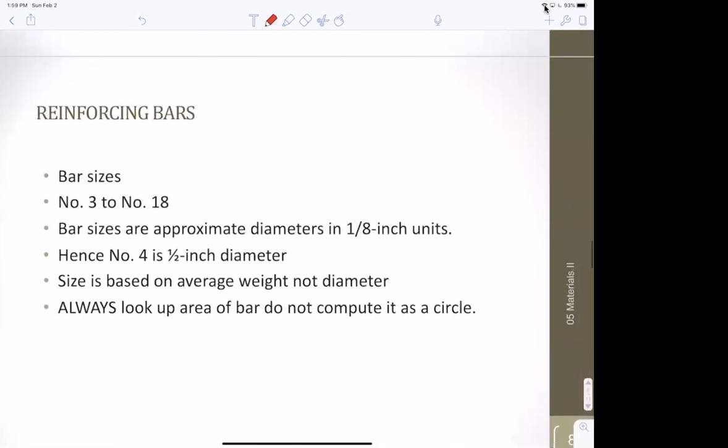Okay, reinforcing bars. We need to talk about this. The steel that goes into concrete comes in bars, and they have different sizes, number 3 through 18. Okay, in this class, we'll use these numbers, but when you buy them, number 3 will say something like 10 on it. I have a table that shows the numbers on the next slide. We'll talk about that. But these bar sizes, we'll use these numbers 3 through 18.

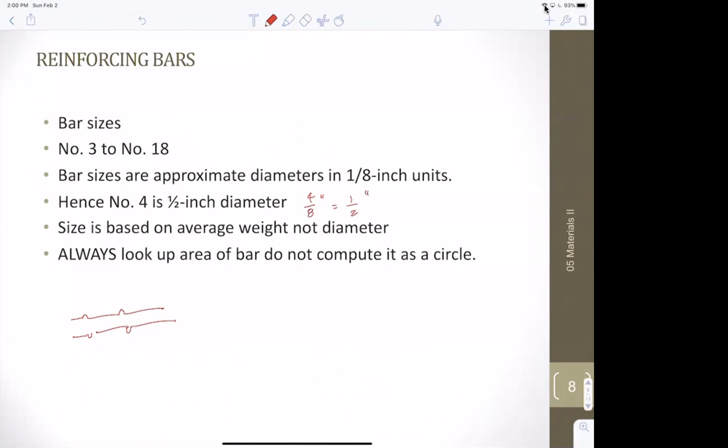They're approximately the diameter in eighths of inches. Okay, so a number 4 is roughly 4/8 inch or ½ inch in diameter. And it's not the actual diameter because these bars, they have ribs on them like this. And so it's the average diameter, not the actual outside diameter. It's based on the weight per foot, and then they calculate what the equivalent diameter will be.

Always look up the area of the bar. Don't compute it as a circle for a couple of reasons. A, it's just more convenient, but B, it's approximately the diameter size. When you get above a number 9, the diameter does not equal the number divided by 8. I'll talk about that in a little bit.

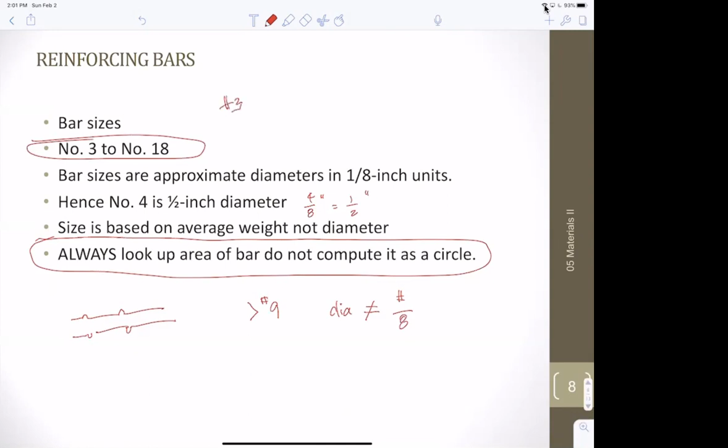Okay, so first thing I want to talk about is the designation. So number 3 bar is roughly 3/8 inch. But on the bar, it will actually say 10 because 10 millimeters is roughly 3/8 inch. Now, why do they do this? Okay, so a while back when the US was considering converting to metric, they passed a law that all rebar would have to have the metric size.

And what we were going to do is go to what's called soft metric. And what that was, it was still a number 3 bar, 3/8 inch diameter, but you would find the closest metric measurement and call it that. And then eventually we would go to the metric bars, and actually the metric bars make more sense. We won't talk about them here. We don't use those, but the metric bars are sized by areas. They're very intelligent, really well done.

And so when you converted to soft metric, all they had to do was take the number 3 off of the bar and put 10 on the bar, because then it would indicate it was 10 millimeters roughly, but it was really 3/8 inch. But you know, these are molds to make these bars, so it's expensive to make this change. You have to throw away all the old molds, make new molds that said 10 on it.

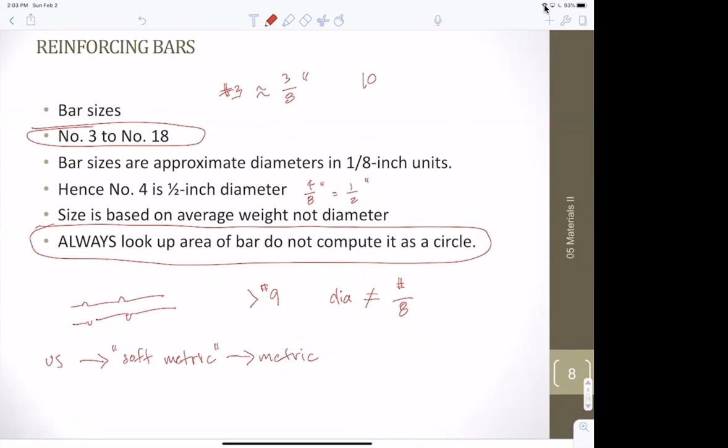Well, we get a few years into this conversion to metric, and then we give up and say, oh, we're going back to English units. Well, the rebar companies are saying, we're not going to make another set of molds. We just changed all our molds over. So we're keeping the metric numbers on them. You're just going to have to remember that 10 actually means a number 3. So here we go.

So first of all, this is from your book. You can see I've got it tagged because I use this table a lot. So these are the numbers you would use in your drawing, number 3, number 4, but these are the actual markings on the bar, 10, 13, 16, and those aren't actually metric bars. There are metric bars. Maybe another day we'll talk about it, or maybe in class I'll talk about the metric bars. And here are the diameters.

And so you can see that it kind of works. See, 3/8, 4/8, 5/8, 6/8, 7/8, 8/8, but here, 9/8 is 1.125. And 10/8 is what? 10 over 8 should be 1.25. So these are all not the right diameters if you take the number and divide it by 8. So what is that? Okay.

Before we had round bars, we had square bars. And so 1 inch square was this. Let me take the square root of 1.27. So 1.27 square inches. Here we go. 1.27. Oh, that's 1 1/8, etc. These are equivalent square bars.

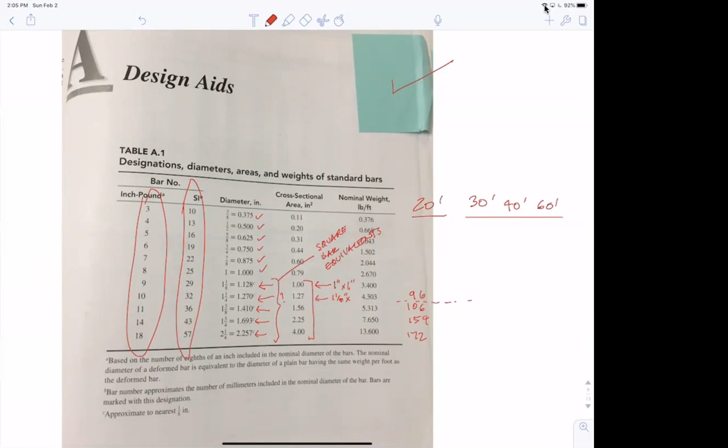And so what happened is that when we changed from square bars to these newfangled circular bars, people back then complained. They say, what? We have to do pi r squared. Square area is just height squared. You guys are making our life so hard. So we kept from number 9 and up, they're actually equivalent square bars, so people would stop complaining.

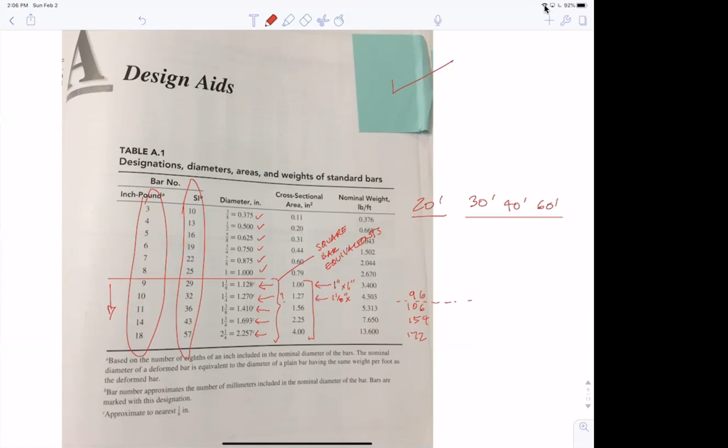I actually have a piece of a square rebar cut from a bridge that sank. Yeah, it's kind of weird. So this is why you can't take the diameter to calculate the area. From number 9 and on, it doesn't work. Okay, so this table is super handy to use in the back of your book.

Okay, so here are what the bar notations look like. And so you can look at the bar. This thing here tells you what mill. See, here's that weird number 11. So number 11, oh, that actually is a 11 bar. So this is old. Now that 11 bar would actually say 36 now. Okay, and here you can see the deformed patterns.

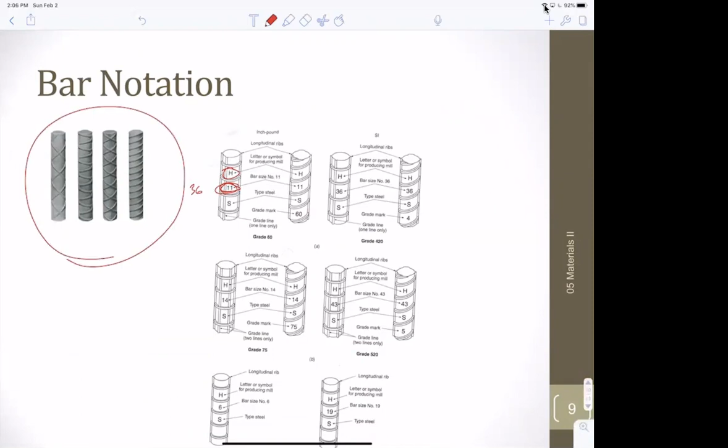Yeah, so this is a little slide on how to read rebar markings. If you're in the field, it used to be easy, like in the lab, I could pick a bar up, say, oh, is it a 3 or a 4? You would look at the number, but now I don't have these numbers memorized, 10, 13, 16, so for me, it's useless. I can't tell what size a bar is by looking at the marker.

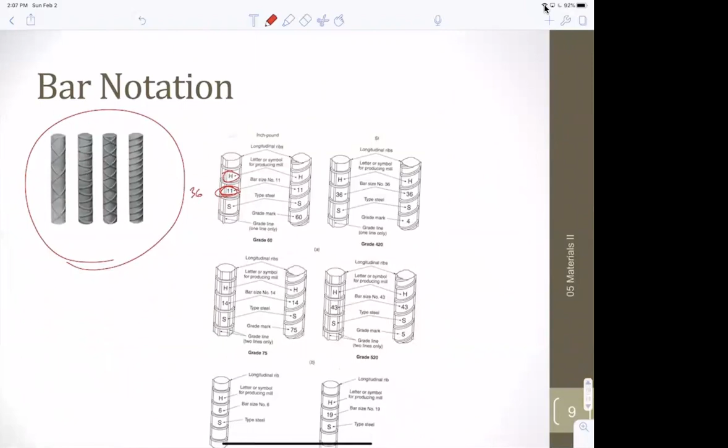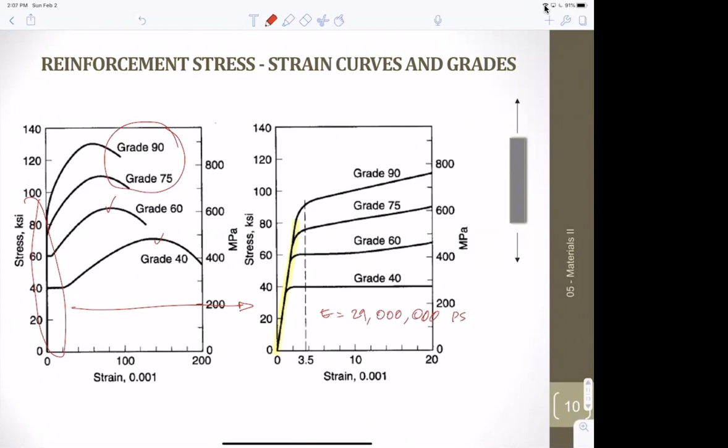And what's interesting, unlike concrete, no matter how strong the steel is, it has the same slope. The E is constant, and it's 29 million psi. So the E of concrete changes with the strength, but the E of steel does not. E is always 29 million for steel.

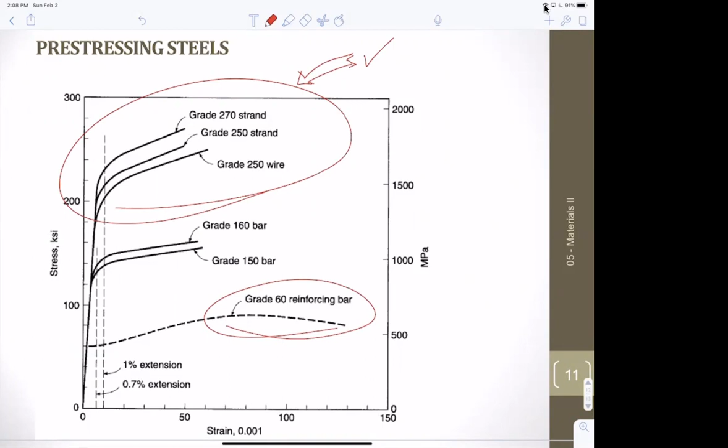Okay, so I want to talk about pre-stressing steel. These are like super high strength, 270 KSI, 250 KSI, compared to what we're using in this class. This is actually kind of a big deal in pre-stressed concrete. You'll talk more about that if you take the pre-stressed concrete class. Until we developed high-strength steel, pre-stressed concrete was not really practical.

Okay, and if you have pre-stressed concrete, it's kind of an interesting thing. So you get some steel, like this, and you stretch it. Obviously, it wouldn't look something like that, but you stretch it to a certain stress, F initial, and then later, it's like the opposite of creep. The deflection is not changing. So in creep, the deflection changes with constant stress.

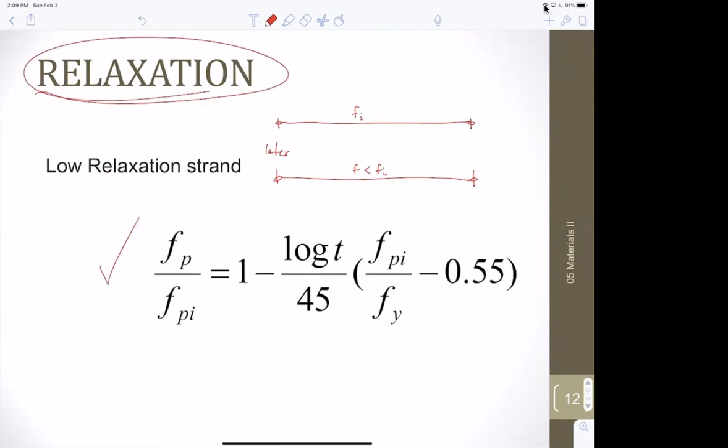Here, the deflection is constant, but the stress is reducing over time. The stress goes down and down and down over time, and it's relaxing. It's called relaxation. And here's a formula on how to do it. Okay. And that's all you need to know for materials for this class. So next time we'll start our first lecture about flexure or moment, bending in concrete.